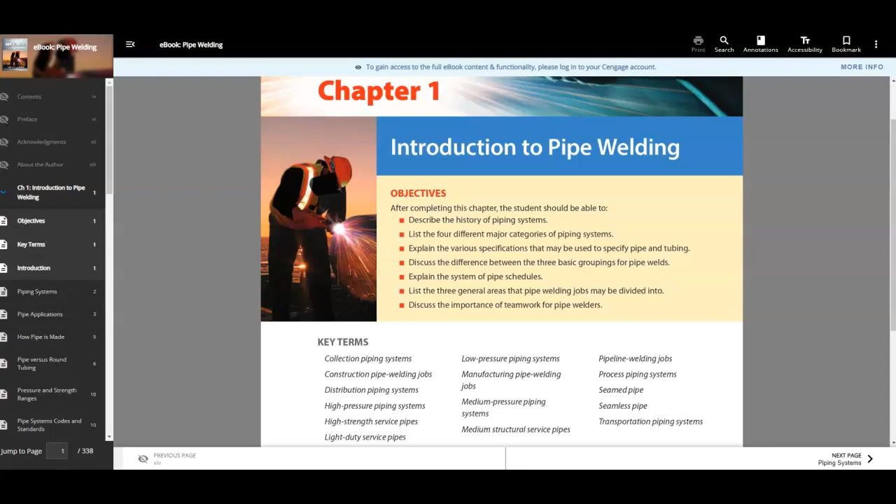Introduction. The earliest piping systems were built by the Greeks approximately 5,000 years ago to provide water to the residences on the island of Crete. Later, as the Roman Empire began to develop, the Romans expanded the Greek clay piping systems of fresh water to include a separate system of drain pipes throughout the city.

These early Roman clay piping systems were gradually replaced with lead pipe. The artisans of the day developed a new process to weld sections of the lead pipe together. Over time, much of the ancient city of Rome was plumbed for water through these lead pipes. Fortunately for the Romans, their water had a high mineral content that quickly coated the inside of the lead pipes,

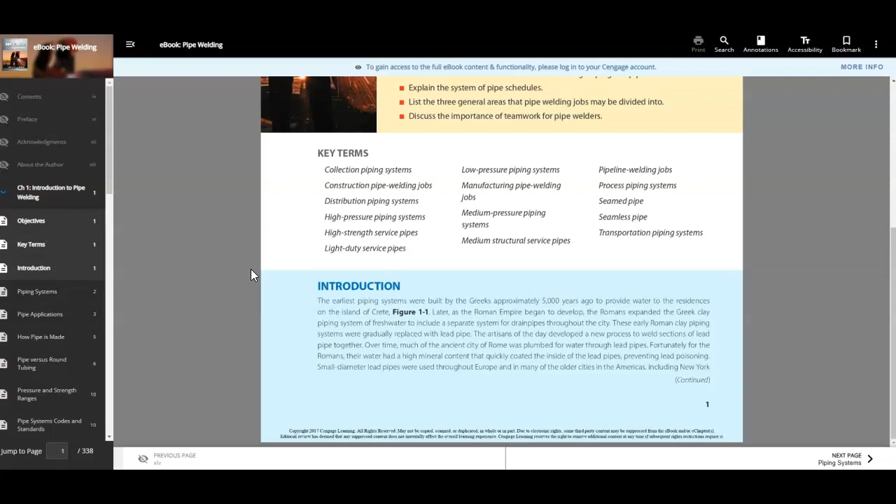preventing lead poisoning. Small diameter lead pipes were used throughout Europe and in many of the older cities in the Americas, including New York City, Boston, and Montreal. Water mains were initially constructed by hollowing out logs. Later, large water mains were made much like very long wooden barrels. Workers used narrow wood strips held together with metal bands tightly wrapped around the outside.

Figure 1-2. Over time, the lead pipes were removed. However, a few of the early wooden water mains that were constructed are still in service. These days, there are millions of miles of pipe used in a wide range of applications throughout the world. The ancient world was limited to only a few materials such as clay, lead, and wood.

But today, pipe can be made from many popular materials such as cast iron, steel, stainless steel, copper, brass, plastic, glass, fiberglass, and concrete. In this textbook, the major concentration will be on fitting and welding steel pipe because the skills learned with steel pipe can be transferred to stainless steel, aluminum, and other metal piping materials.

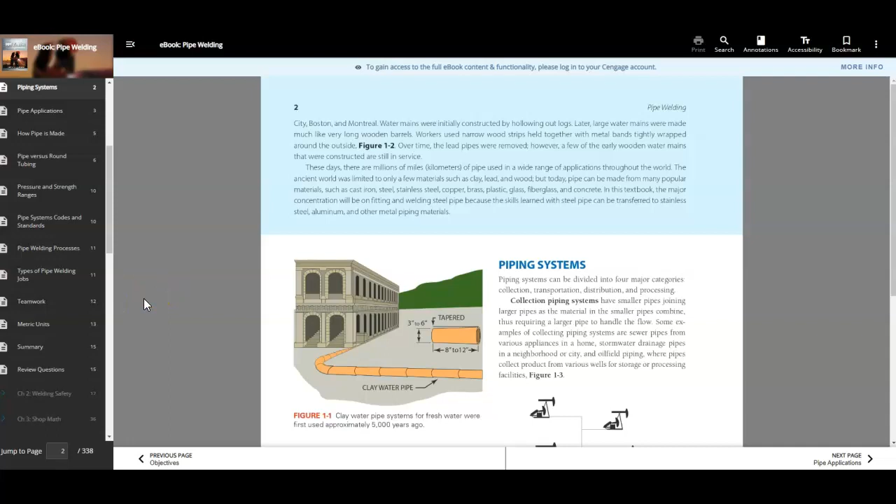Piping systems. Piping systems can be divided into four major categories: collection, transportation, distribution, and processing. Collecting piping systems have smaller pipes joining larger pipes as the material in the smaller pipes combine, thus requiring a large pipe to handle the flow.

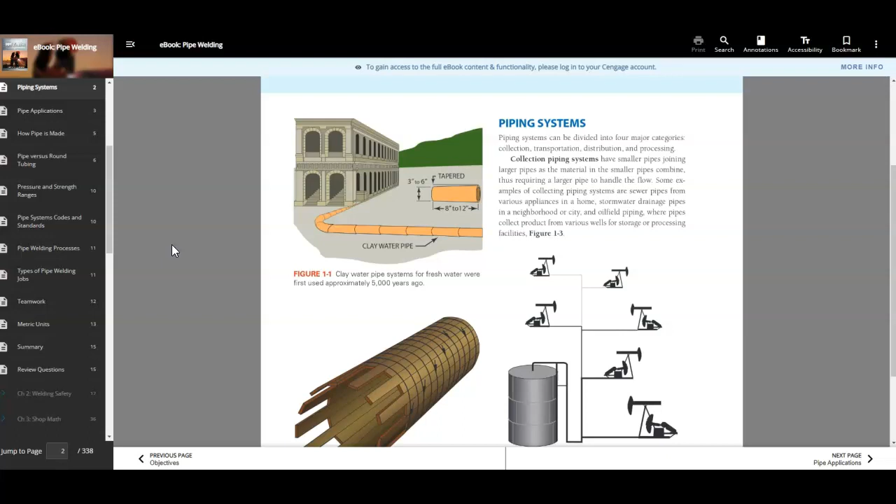Some examples of collecting piping systems are sewer pipes from various appliances in the home, stormwater drain pipes in the neighborhood or city, and oil field piping, where pipes collect product from various wells for storage and processing facilities.

They are usually buried beneath the Earth's surface and can be seen only where they surface at pumping and pressure regulator stations. Some examples of transportation pipelines are water pipes that are used to move raw water from reservoirs to water treatment plants, fuel lines that move gasoline, diesel fuel, and jet fuel from coastal refineries to distribution facilities inland,

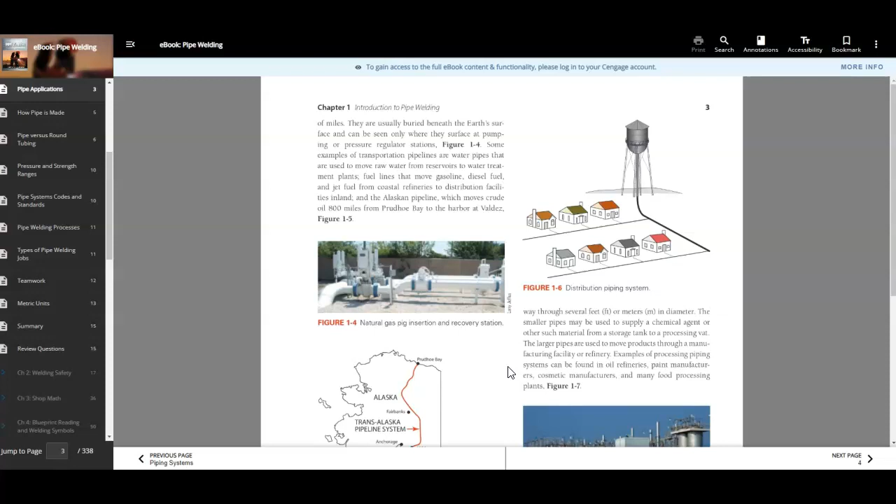and the Alaskan pipeline, which moves crude oil 800 miles from Prudhoe Bay to the harbor at Valdez.

Distribution piping systems have smaller individual pipes connected to large mains. They are used to deliver products such as natural gas and water for homes and factories, compressed air for pneumatic tools, shielding gases for welding, and chilled water for air conditioning. For many years, a brewery in Germany moved beer directly from its plants to a nearby stadium through a distribution piping system.

Process piping systems can be very diverse in size and materials. The diameter of some pipes may be as small as a fraction of an inch or a few millimeters, all the way through several feet or meters in diameter.

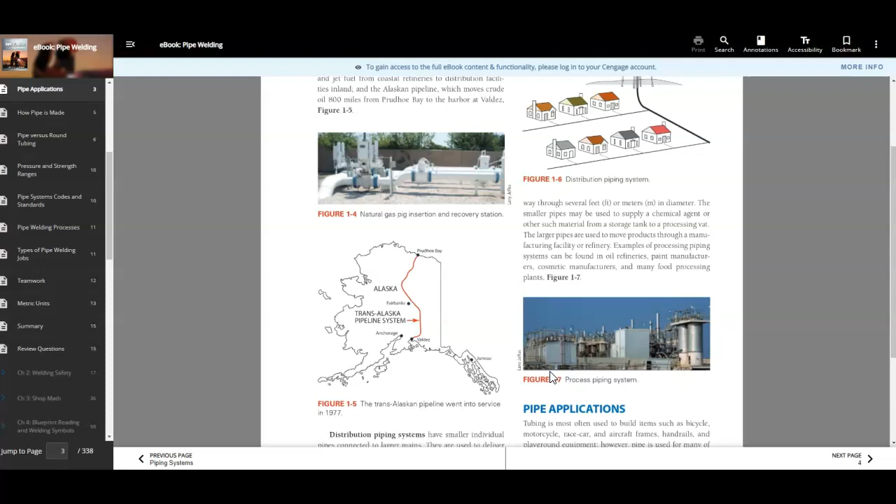The smaller pipes may be used to supply a chemical agent or other such material from a storage tank to a processing vat. The large pipes are used to move products through a manufacturing facility or refinery. Examples of process piping systems can be found in oil refineries, paint manufacturers, cosmetic manufacturers, and many food processing plants. Pipe applications.

Tubing is most often used to build items such as bicycle, motorcycle, race car, and aircraft frames, handrails, and playground equipment. However, pipe is used for many of these applications too. Both are used for structural applications or ornamental or decorative art.

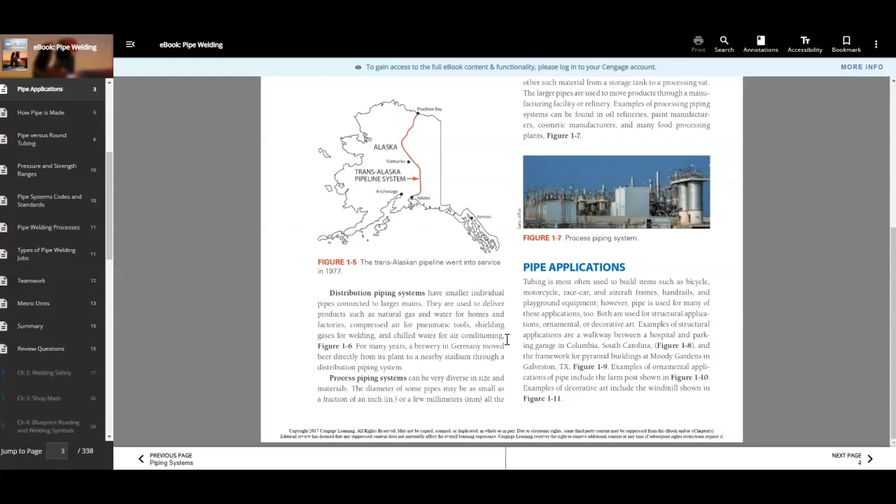Examples of structural applications are a walkway between a hospital and a parking garage in Columbia, South Carolina, figure 1-8, and the framework for pyramid buildings at Moody Gardens in Galveston, Texas, figure 1-9. Examples of ornamental applications of pipe include the farm post shown in figure 1-10. Examples of decorative art include the windmill shown in figure 1-11.

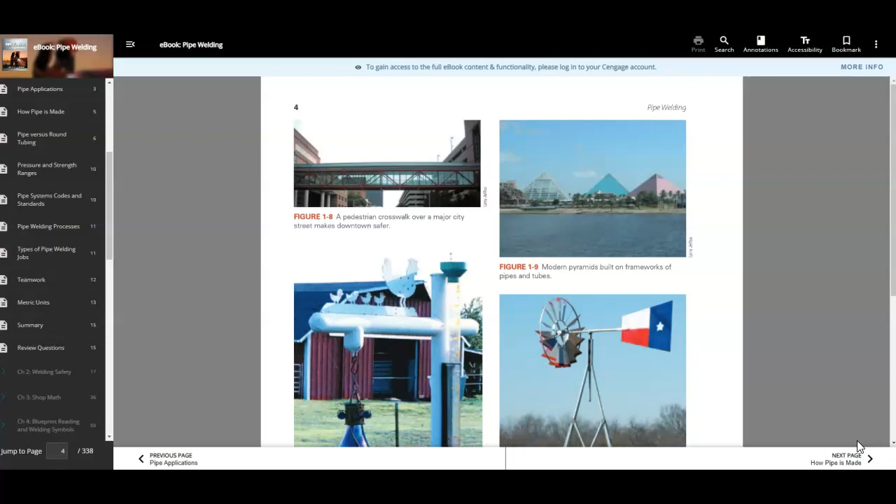A pedestrian crosswalk over a major city street makes a downtown safer. Modern pyramids built on frameworks of piping and tubes. Rain gauge or hummingbird feeder pipe garden posts, and a windmill built out of 1/2 inch electrical mechanical tubing.

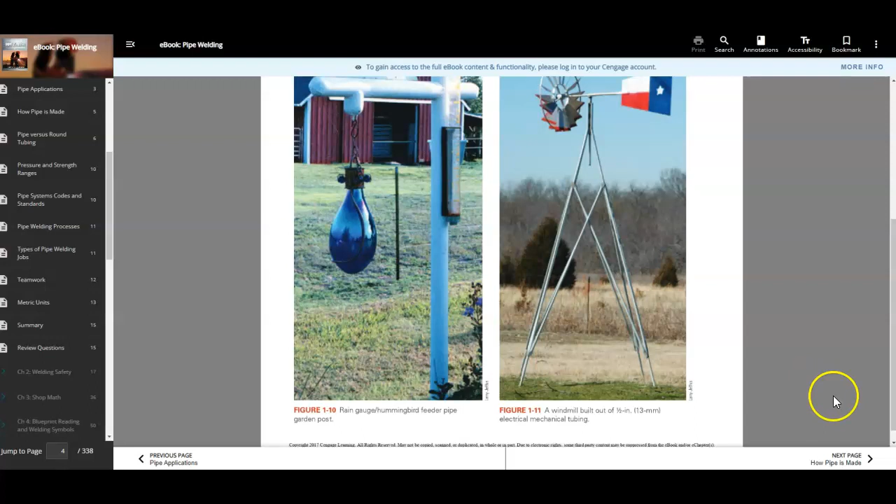How pipe is made. Pipe can be manufactured as seamed or seamless. Seamed pipe has a longitudinal weld along its full length. It is formed from flat plates that are first heated, then pressed through rollers that bend it into pipe shape. Resistance seam welding machines use rollers to pass the welding current through the pipe and to fuse the edges of the plate together, forming the longitudinal weld. Figure 1-12, seamed pipe manufacturing technique.

A cutter removes the small amount of weld flash from the outside of the weld. The small weld flash on the inside of the pipe may or may not be removed. The pipe is then cut into sections.

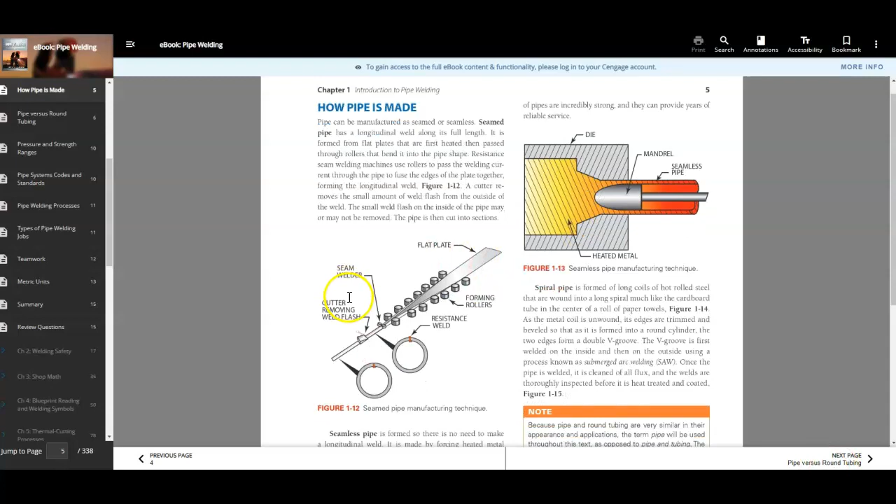Seamless pipe is formed so there is no need to make a longitudinal weld. It is made by forcing heated metal through a forming die that has an internal mandrel to form the center opening in the pipe. Figure 1-13 shows both seamless and seamed pipe sections are thoroughly inspected following manufacturing to ensure that they are sound. Both types of pipe are incredibly strong and they can provide years of reliable service. Seamless pipe manufacturing technique.

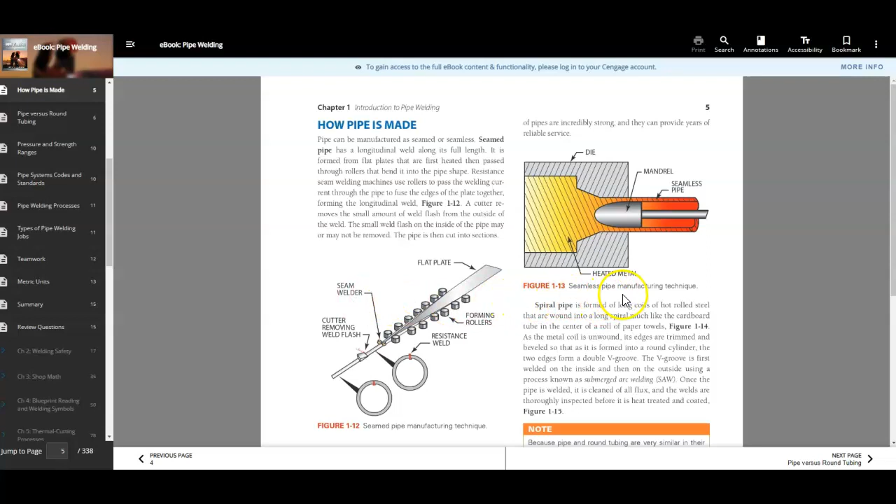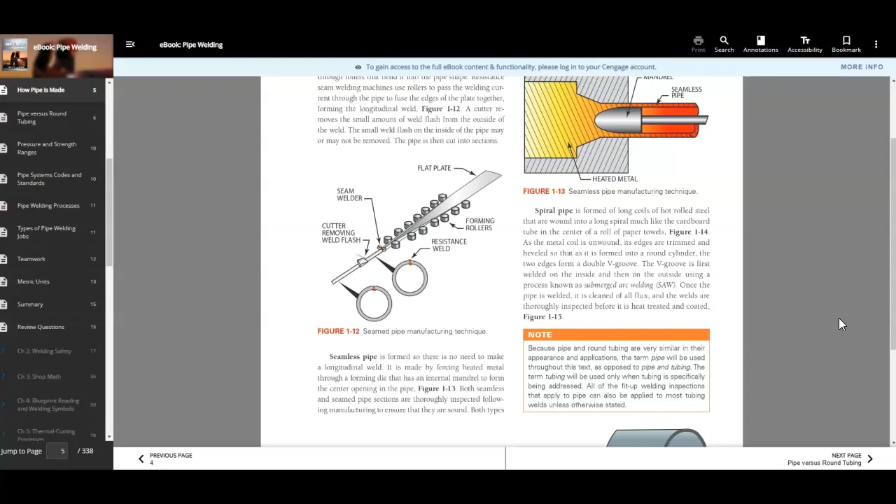Spiral pipe is formed of long coils of hot rolled steel that are wound into a long spiral, much like the cardboard tube in the center of a roll of paper towels. Figure 1-14 shows spiral pipe manufacturing technique. As the metal coil is unwound, its edges are trimmed and beveled so that it forms into a round cylinder. The two edges form a double V groove.

The V groove is first welded on the inside and then on the outside using a process known as submerged arc welding. Once the pipe is welded, it is cleaned of all flux and the welds are thoroughly inspected before it's heat treated and coated.

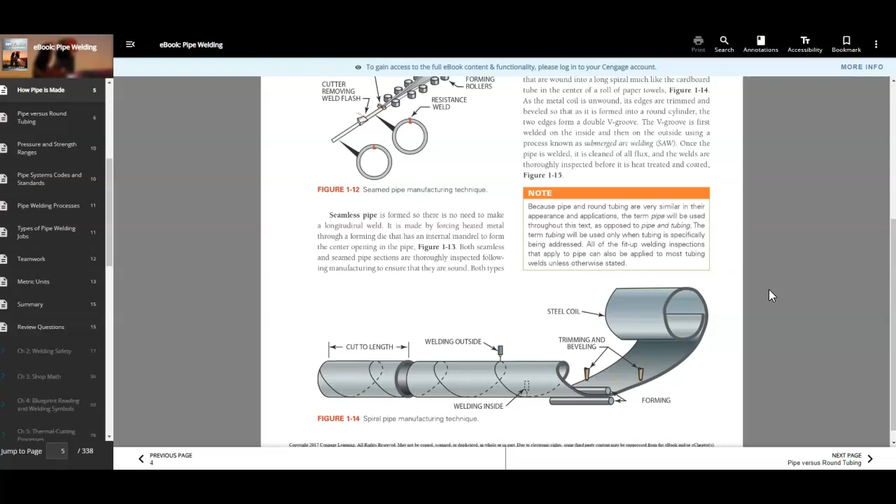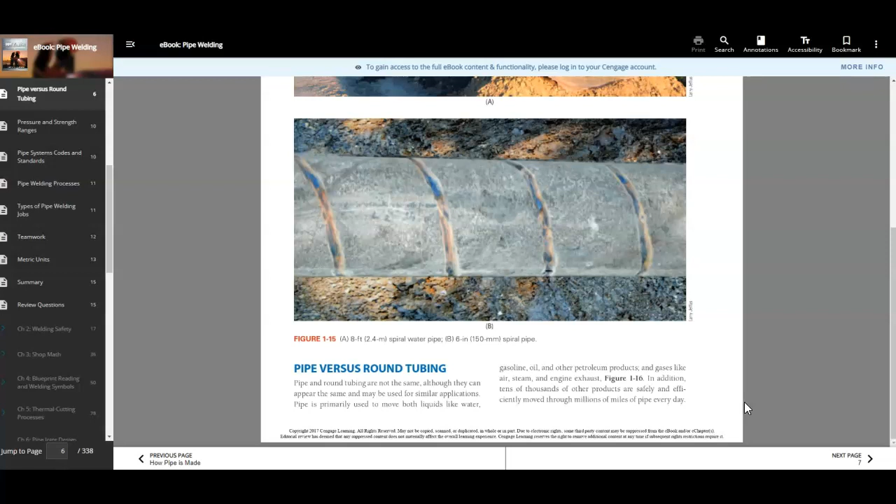Pipe versus round tubing. Pipe and round tubing are not the same, although they can appear the same and may be used in similar applications. Pipe is primarily used to move both liquids like water, gasoline, oil, and other petroleum products, and gases like air, steam, and engine exhaust. In addition, tens of thousands of other products are safely and efficiently moved through millions of miles of pipe every day.

Round tubing is used for both structural applications and to move fluids. Tubing is the structural component of many common products such as classroom and office furniture, highway guardrails, playground equipment, and roller coasters. Pipe and round tubing are different in the way they are specified.

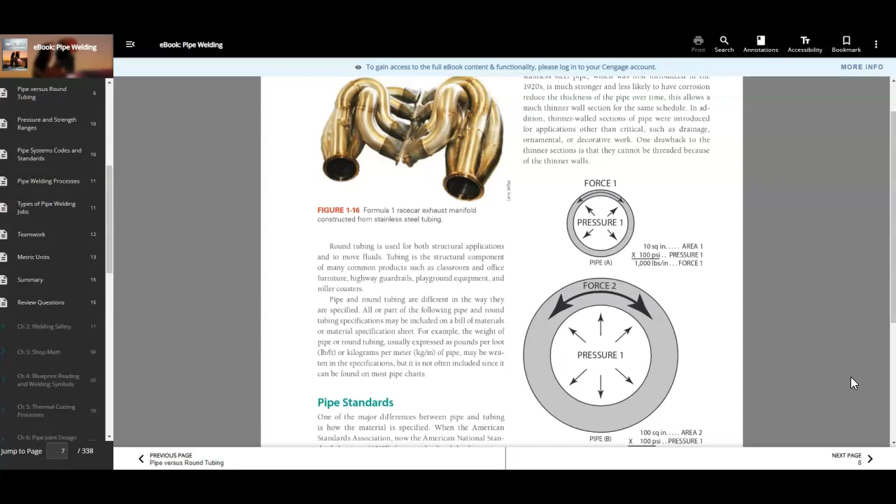All or part of the following pipe and round tubing specifications may be included on a bill of materials or a material specification sheet. For example, the weight of pipe or round tubing, usually expressed as pounds per foot or kilograms per meter of pipe, may be written in the specifications but is not often included since it can be found on most pipe charts.

Pipe standards. One of the major differences between pipe and tubing is how the material is specified. The American Standards Association, now the American National Standards Institute, ANSI, first standardized the dimensions for steel and iron pipe and tubing. There were few applications for pipe, so only a few different pressure ranges were available. The various pressure ranges determined the thickness of the wall of the pipe. Figure 1-17, diameter and wall thickness versus pressure.

The original standards only included standard, extra strong, and double extra strong. Today, standard pipe is often Schedule 40, extra strong pipe is often Schedule 80, and double extra strong pipe does not have a schedule number. Table 1.1 shows the various pipe schedules and wall thicknesses for a variety of pipe diameters that are available today. Changes in the marketplace have resulted in a significant increase in the various pressure ranges and wall thicknesses of the pipe.

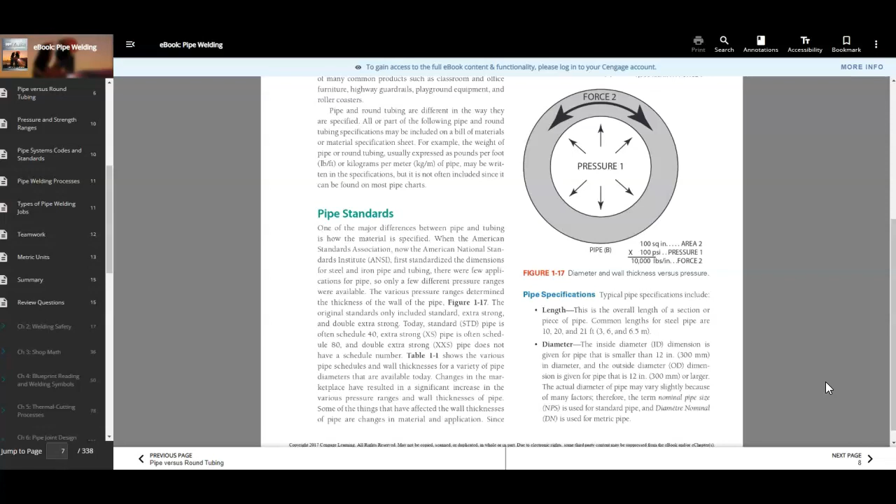Some of the things that have affected the wall thickness of the pipe are changes in the material and application. Since stainless steel pipe, which was first introduced in the 1920s, is much stronger and less likely to have corrosion, this reduced the thicknesses of the pipe over time.

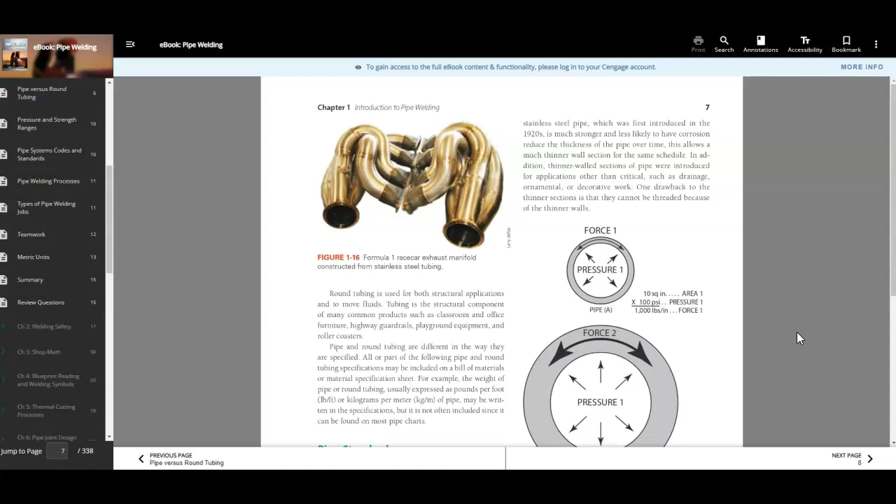This allows much thinner wall sections for the same schedule. In addition, thinner walled sections of pipe were introduced for applications other than critical, such as drainage, ornamental, or decorative work. One drawback to the thinner sections is that they cannot be threaded because of the thinner walls.

Pipe specifications. Typical pipe specifications include length. This is the overall length of the section or piece of pipe. Common lengths for steel pipe are 10, 20, and 21 foot.

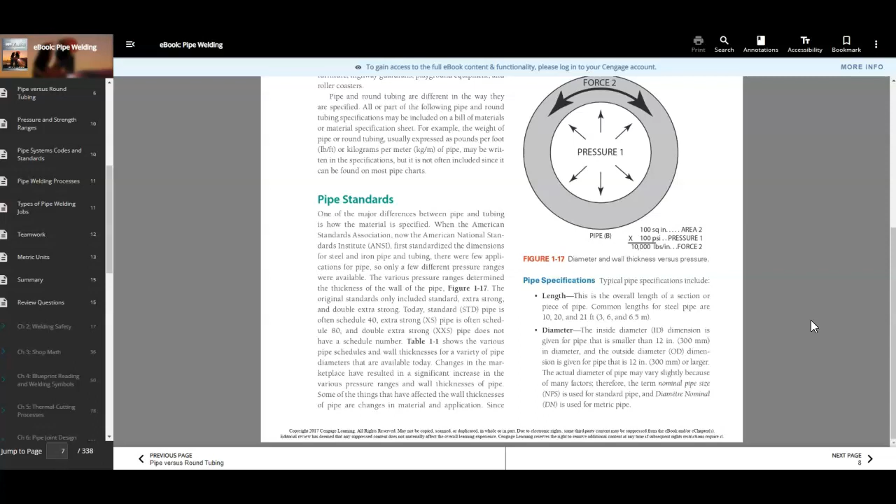Diameter. The inside diameter dimension is given for pipe that is smaller than 12 inches in diameter, and the outside diameter, OD, dimension is given for pipe that is 12 inches or larger. The actual diameter of the pipe may vary slightly because of many factors. Therefore, the term nominal pipe size is used for standard pipe, and diameter nominal is used for metric pipe.

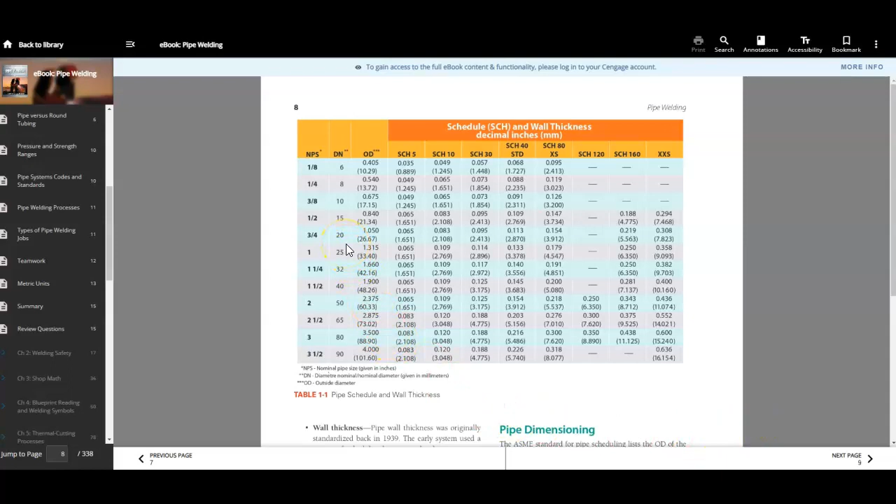Pipe wall thickness was originally standardized back in 1939. The early system used a system of schedules that were related to a pressure range. The basis of that original system grouped pipe into three pressure ranges: standard, extra strong, and double extra strong. The current standard for pipe wall thickness is the National Pipe Standard, Table 1-1.

Note on the chart that the current system still has some relationship to the early terminology, but it is important to note that now there is not a pressure range relationship, i.e., a Schedule 40 standard steel pipe has a higher pressure range than the Schedule 40 PVC pipe would have.

Material. The American Society of Mechanical Engineers, or ASME, has a number of specifications that cover a wide range of materials and methods of manufacturing pipe. The ASME specifications range from AS-135 for electrical resistance welding steel pipe to AS-378 for seamless, austenitic, high pressure, high temperature pipe. Fittings.

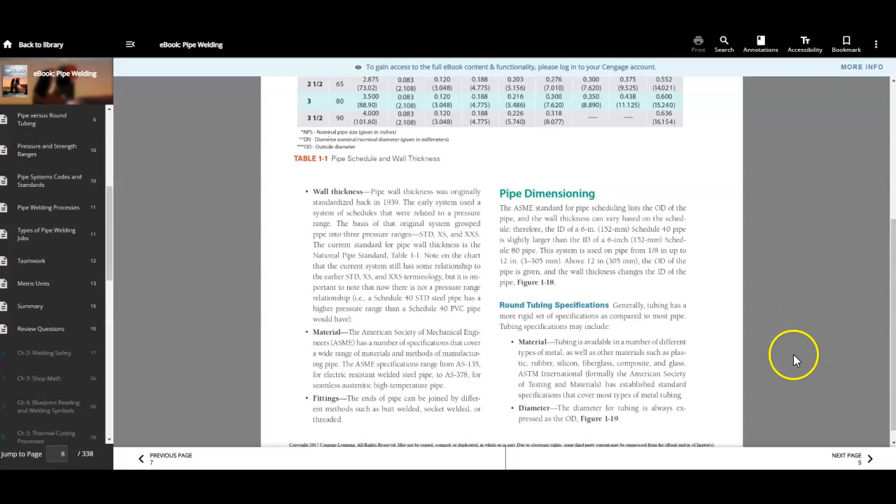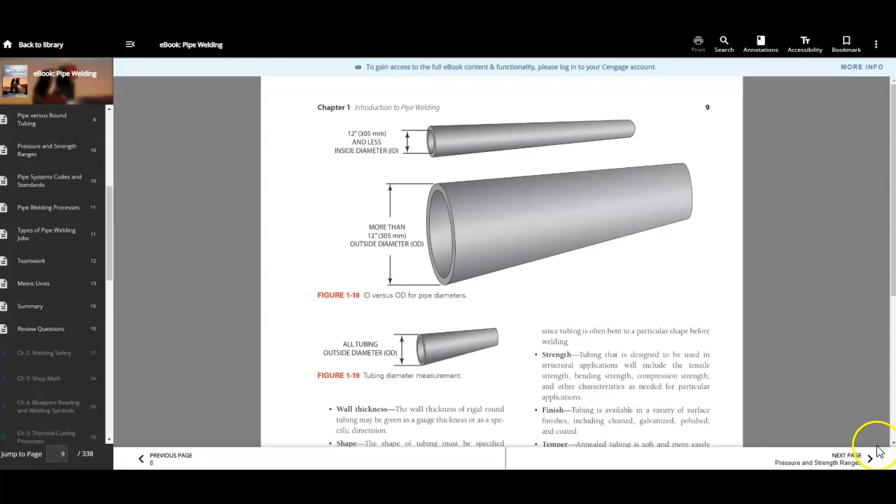ID versus OD for pipe diameters. 12-inch and less: inside diameter. More than 12 inches: outside diameter. All tubing is outside diameter.

Wall thickness. The wall thickness of rigid round tubing may be given as a gauge thickness or as a specific dimension. Shape. The shape of tubing must be specified because it is available in shapes other than round, such as rectangular, square, oval, and a wide range of specialty shapes.

Length. Rigid round tubing can be purchased in lengths ranging from 5 to 24 feet, and flexible round tubing can be purchased in coils ranging from a few feet to several hundred feet. Common lengths for flexible tubing are coils of 25 to 50 feet.

Pressure range. Because some types of tubing are designed to carry pressurized fluids, a pressure range for these tubes would be included in their specifications. Temperature range. The operating temperature range for the minimum or maximum service temperature is important because both high and low temperatures will affect the performance of the tubes.

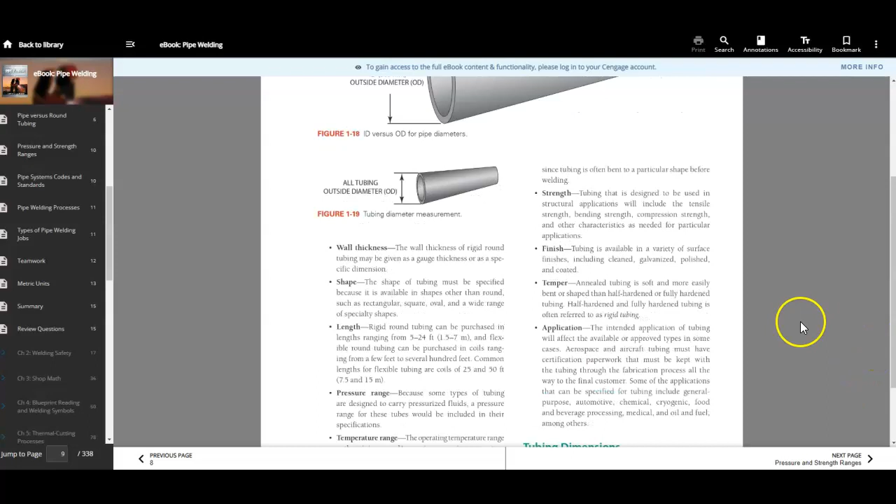Bending radius. The minimum bend radius of a tube can be a major determination in the selection, since tubing is often bent to a particular shape before welding.

Strength. Tubing that is designed to be used in structural applications will include the tensile strength, bending strength, compression strength, and other characteristics as needed for particular applications.

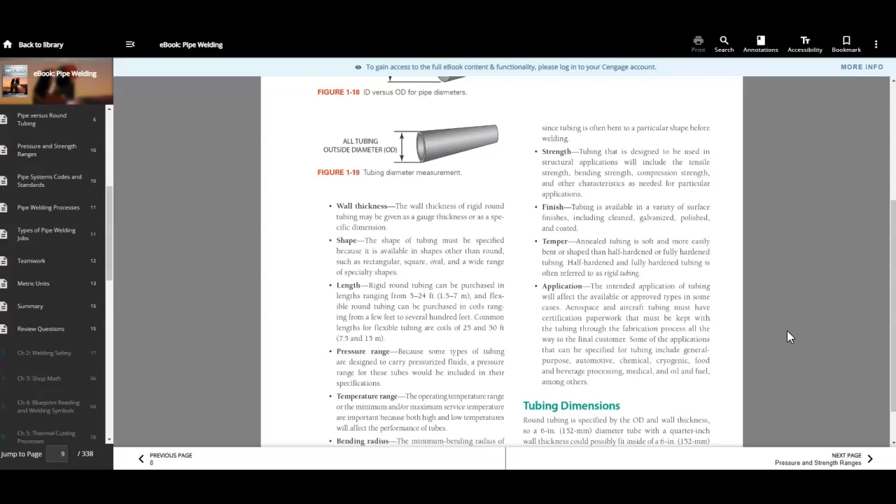Finish. Tubing is available in a variety of surface finishes, including cleaned, galvanized, polished, and coated.

Temper. Annealed tubing is soft and more easily bent or shaped than half-hardened or fully hardened tubing. Half-hardened and fully hardened tubing is often referred to as rigid tubing.

Application. The intended application of tubing will affect the available or approved types in some cases. Aerospace and aircraft tubing must have certification paperwork that must be kept with the tubing throughout the fabrication process, all the way to the final customer. Some of the applications that can be specified for tubing include general purpose, automotive, chemical, cryogenic, food and beverage processing,

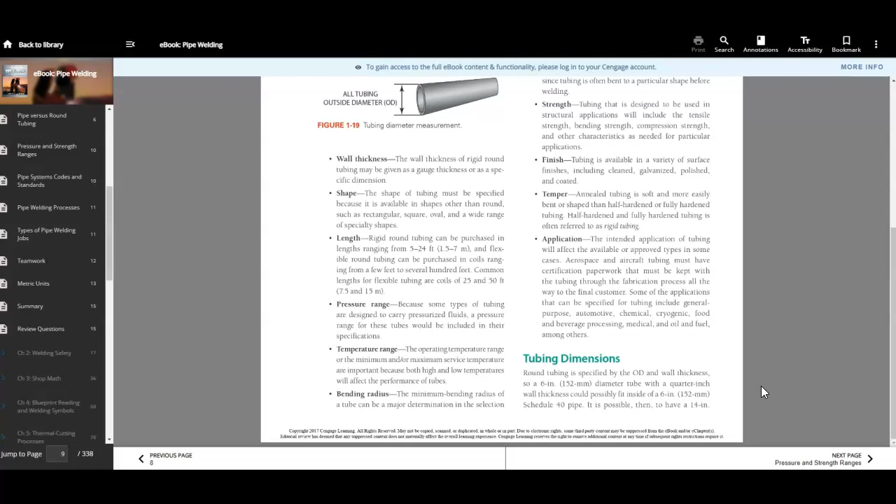Medical, and oil and fuel, among others. Tubing dimensions. Round tubing is specified by the outside diameter and wall thickness. So a 6-inch diameter tube with a quarter-inch wall thickness could possibly fit inside a 6-inch Schedule 40 pipe. It is possible then to have a 14-inch diameter pipe and a 14-inch diameter tube that would have the same wall thickness if the tubing wall thickness was specified to be the same as the pipe.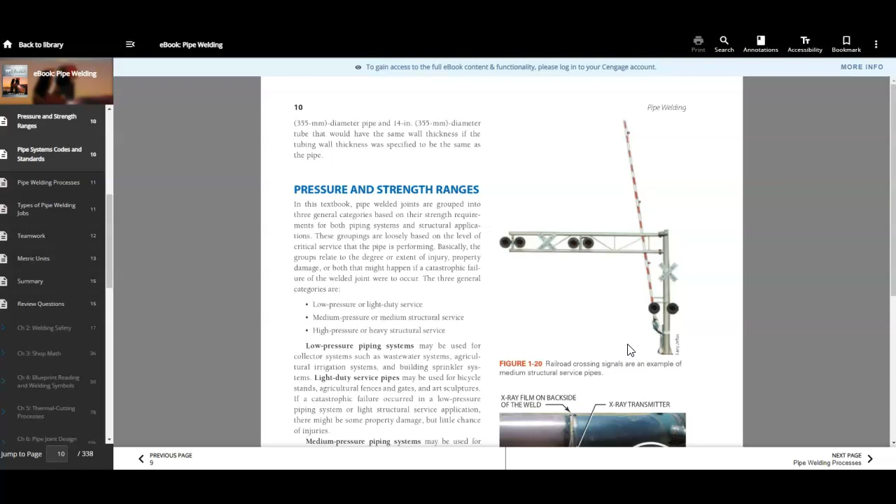Pressure and strength ranges. In the textbook, pipe welded joints are grouped into 3 general categories based on their strength requirements for both piping systems and structural applications. These groups are loosely based on the level of critical service that the pipe is performing. Basically, the groups relate to the degree or extent of injury, property damage, or both that might happen if a catastrophic failure of the weld joint were to occur.

The 3 general categories are low pressure or light duty service, medium pressure or medium structural service, or high pressure or heavy structural service.

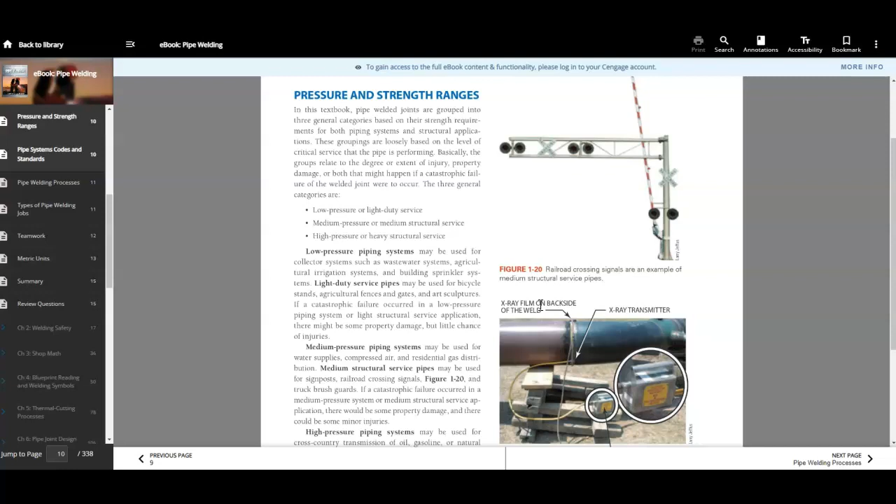Low pressure piping systems may be used for collector systems such as wastewater systems, agricultural irrigation systems, and building sprinkler systems. Light duty service pipes may be used for bicycle stands, agricultural fences and gates, and art sculptures. If a catastrophic failure occurred in a low pressure piping system or light structural service application, there might be some property damage, but little chance of injuries.

Medium pressure piping systems may be used for water supplies, compressed air, and residential gas distribution. Medium structural service pipes may be used for signposts, railroad crossing signals, and truck brush guards. If a catastrophic failure occurred in medium pressure systems or medium structural service applications, there would be some property damage and there could be some minor injuries.

High pressure piping systems may be used for cross-country transmission of oil, gasoline, and natural gas, oil refineries, and high pressure steam pipes in power plants. High strength service pipes may be used for aircraft engine mounts, building frameworks, and tank support legs. A catastrophic failure in a high-pressure system or a high-strength structure will result in significant property damage and can result in serious injury or possibly death.

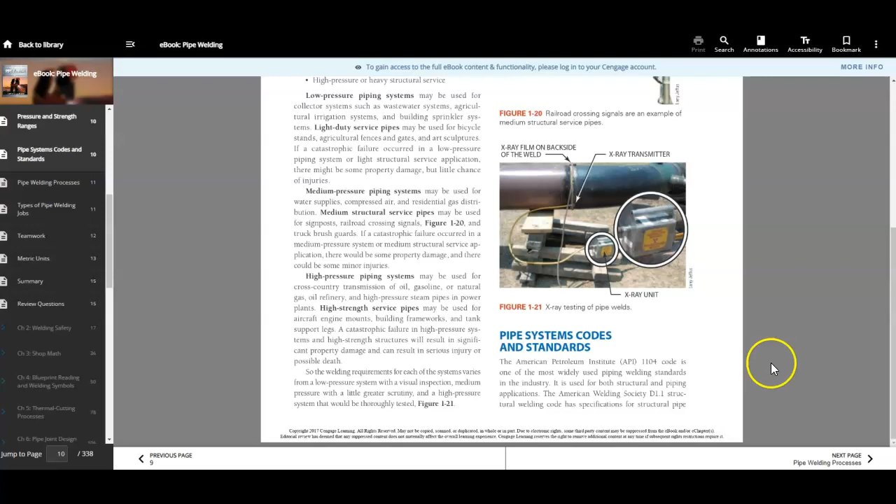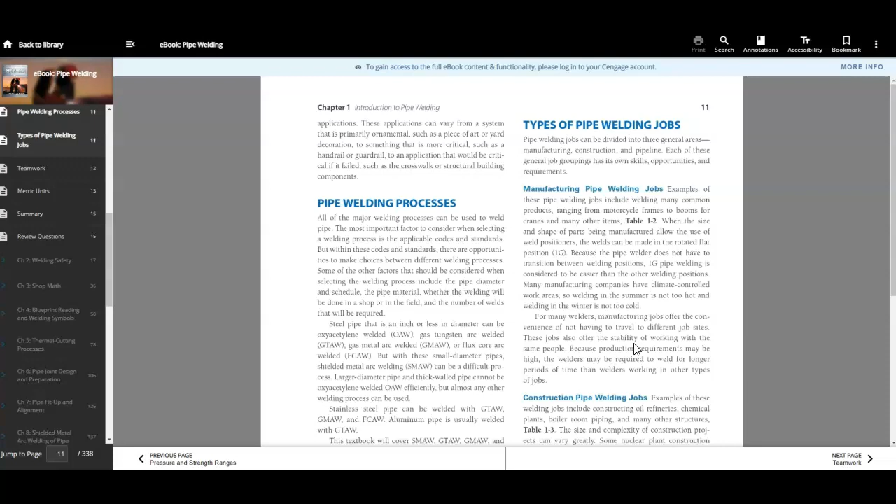The American Welding Society D1.1 structural welding code has specifications for structural pipe applications. These applications can vary from a system that is primarily ornamental, such as a piece of art or yard decoration, to something more critical, such as a handrail or a guardrail, to an application that would be critical if it failed, such as a crosswalk or structural building components.

Pipe welding processes. All of the major welding processes can be used to weld pipe. The most important factor to consider when selecting a welding process is the applicable codes and standards. But within these codes and standards, there are opportunities to make choices between different welding processes.

Some of the other factors that should be considered when selecting the welding process include the pipe diameter and schedule, the pipe material, whether the welding will be done in the shop or in the field, and the number of welds that will be required.

Steel pipe that is an inch or less in diameter can be oxyacetylene welded, gas tungsten arc welded, gas metal arc welded, or flux core arc welded. But with these small diameter pipes, shielded metal arc welding can be a difficult process. Large diameter pipe and thick walled pipe cannot be oxyacetylene welded efficiently, but almost any other welding process can be used.

Stainless steel pipe can be welded with TIG, MIG, or flux core. Aluminum pipe is usually welded with TIG. The textbook will cover stick, TIG, MIG, and flux, which are the most commonly used welding processes for pipe welding.

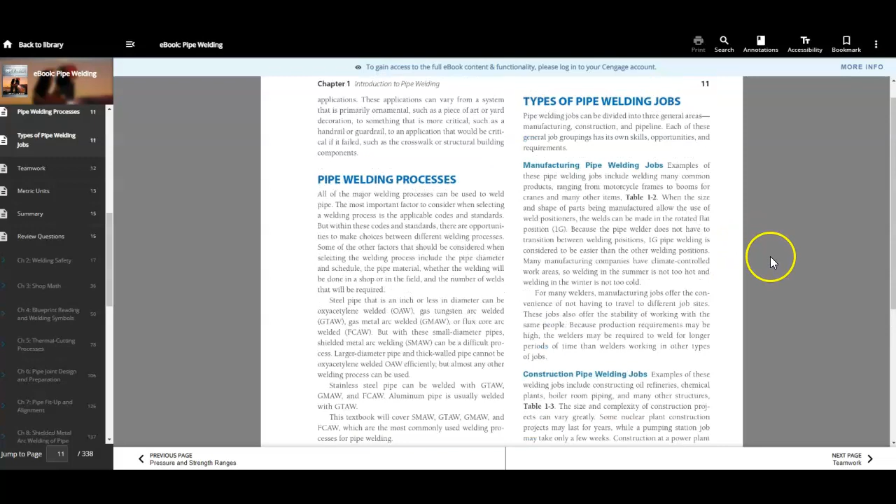Types of pipe welding jobs.

Pipe welding jobs can be divided into three general areas: manufacturing, construction, and pipeline. Each of these general job groups has its own skills, opportunities, and requirements.

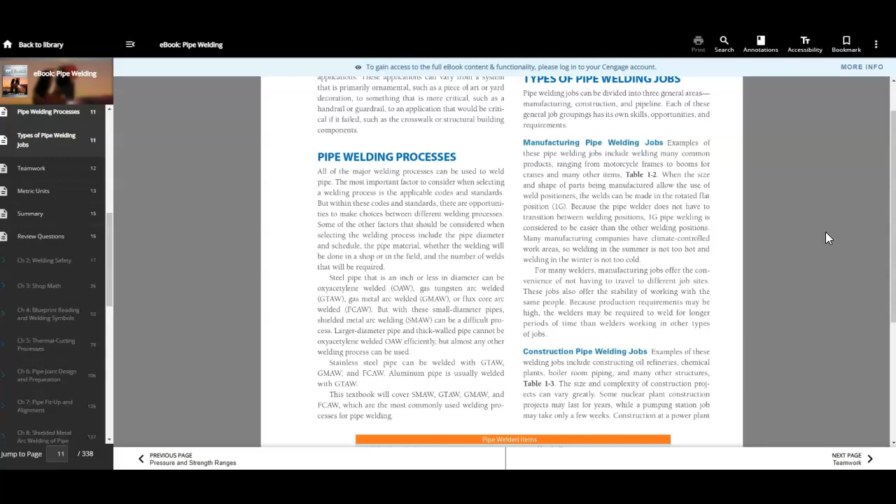Manufacturing pipe welding jobs. Examples of these pipe welding jobs include welding many common products ranging from motorcycle frames to booms for cranes and many other items. Table 1-2, pipe welding items that are manufactured with pipe.

When the size and the shape of the parts being manufactured allow the use of weld positioners, the welds can be made in the rotated flat position, 1G. Because the pipe welder does not have to transition between welding positions, 1G pipe welding is considered to be easier than other welding positions.

Many manufacturing companies have climate controlled work areas, so welding in the summer is not too hot and welding in the winter is not too cold.

For many welders, manufacturing jobs offer the convenience of not having to travel to different job sites. These jobs also offer the stability of working with the same people.

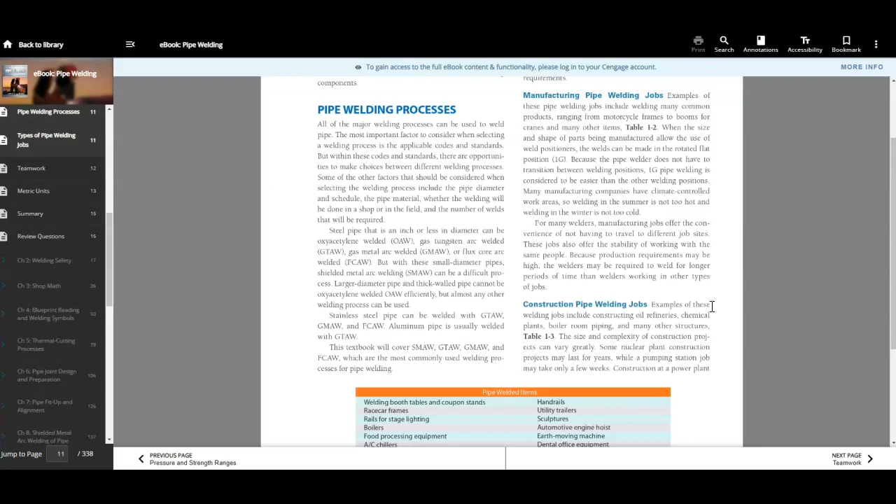Because production requirements may be high, the welders may be required to weld for longer periods of time than welders working in other types of jobs.

Construction pipe welding jobs. Examples of these welding jobs include constructing oil refineries, chemical plants, boiler room piping, and many other structures. Table 1-3. The size and complexity of construction projects can vary greatly.

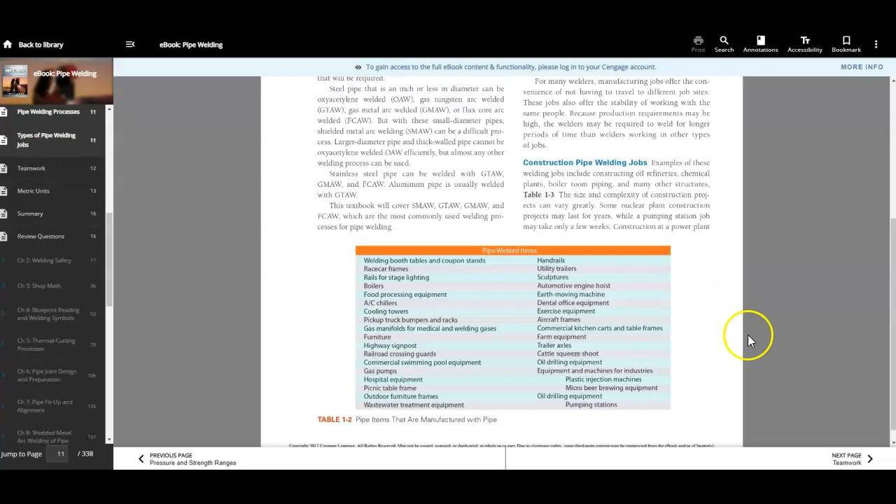Some nuclear power plant construction projects may last for years, while a pumping station job may only take a couple of weeks. Construction at a power plant

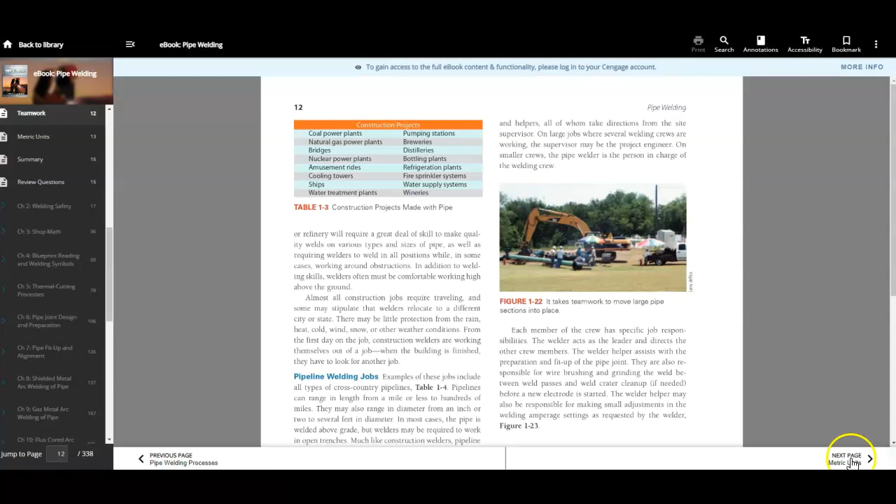or refinery will require a great deal of skill to make quality welds on various types and sizes of pipes, as well as requiring welders to weld in all positions while in some cases working around obstructions.

In addition to welding skills, welders often must be comfortable working high above the ground.

Almost all construction jobs require traveling, and some may stipulate that the welders relocate to a different city or state. There may be little protection from the rain, heat, cold, wind, snow, or other weather conditions.

From the first day on the job, construction welders are working themselves out of a job. When the building is finished, they have to look for another job.

Pipeline welding jobs. Examples of these jobs include all types of cross-country pipelines. Figures or table 1-4. Pipelines can range in length from a mile or less to hundreds of miles. They may also range in diameter from an inch or two to several feet in diameter.

In most cases, the pipe is welded above ground or above grade, but welders may be required to work in open trenches. Much like construction welders, pipeline welders may be required to travel or relocate and work in all types of weather.

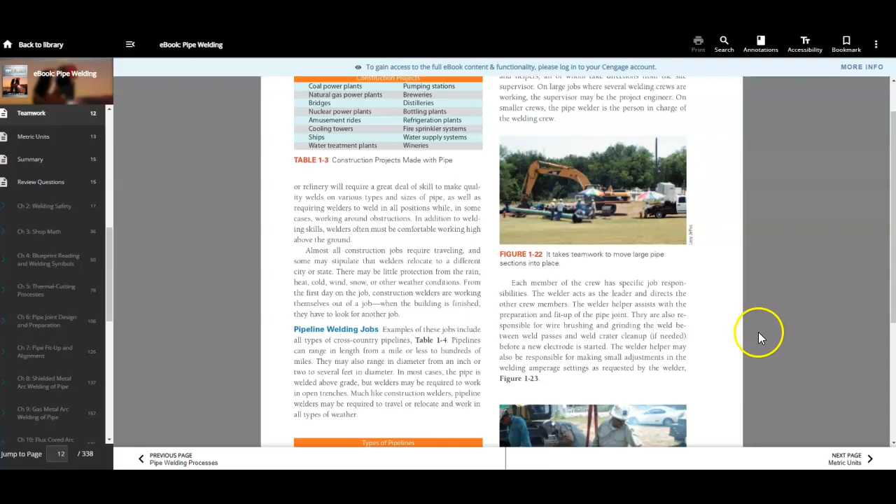Teamwork. There's a lot of work that needs to be done to make a weld on large diameter pipe. Often there is more work than a single welder can do in a timely manner to meet the scheduled deadline. So most pipeline welding jobs and many pipe construction welding projects are often done by a crew.

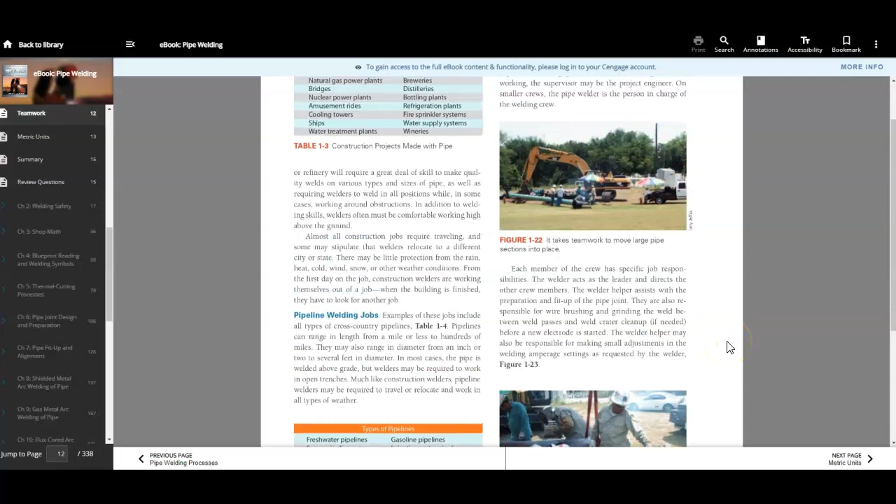Figure 1-22. It takes teamwork to move large pipe sections into place. The crews are made up by welders and helpers, all of whom take directions from the site supervisor.

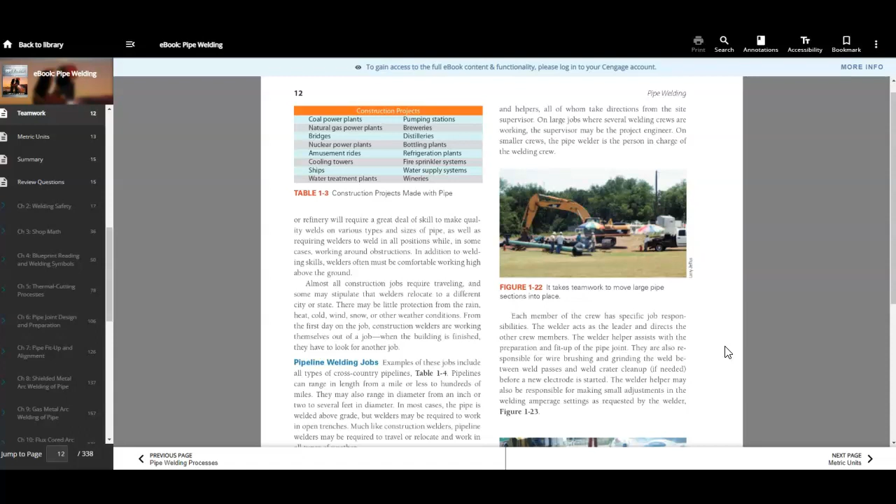On large jobs where several welding crews are working, the supervisor may be the project engineer. On smaller crews, the pipe welder is the person in charge of the welding crew. Each member of the crew has a specific job responsibility. The welder acts as the leader and directs the other crew members.

The welder helper assists with the preparation and fit up of the pipe joint. They are also responsible for wire brushing and grinding the weld between weld passes, and weld crater cleanup if needed before the new electrode is started. The welder helper may also be responsible for making small adjustments in the welding amperage settings as requested by the welder.

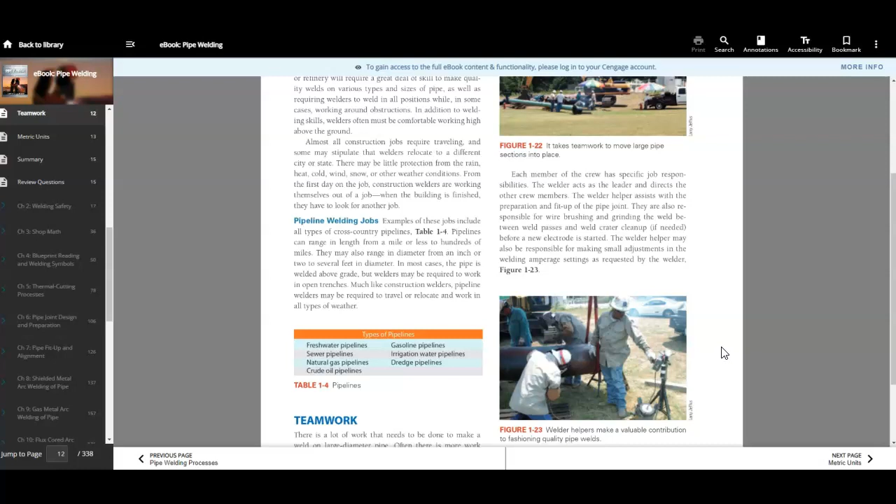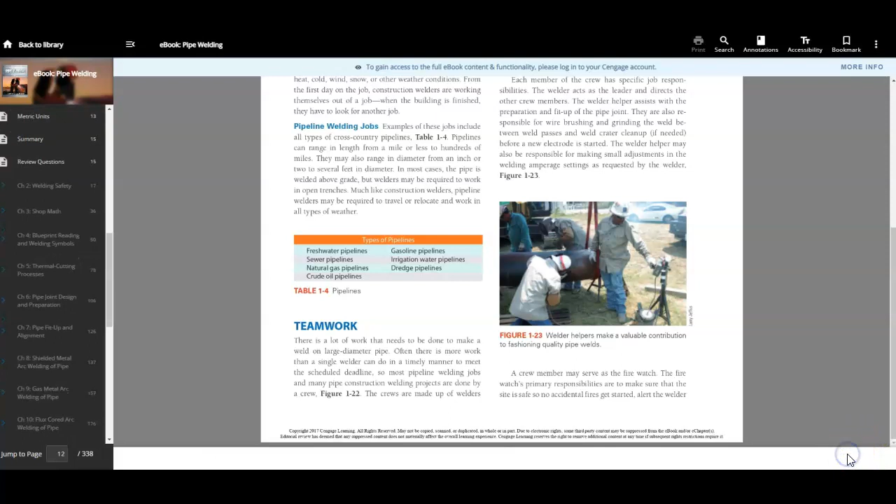A crew member may serve as a fire watch. The fire watch's primary responsibilities are to make sure the site is safe so no accidental fires get started, to alert the welder and sound the alarm if a fire does occur, and be prepared to use the available fire extinguisher to put out the fire. When all combustible materials cannot be removed from the welding area, this person may wet them down or cover them up.

Other crew members may operate equipment to lift and place the pipe joints and pipe sections in place, as well as performing other tasks that are required.

Leadership. A team leader must have knowledge of the equal employment opportunity laws regarding job discrimination and make sure these laws are followed. A good team leader should have a positive attitude, think and plan ahead, treat everyone with respect, show confidence in crew members' abilities, and most important, communicate clearly to each member what is expected of him or her.

It is important to recognize the various strengths and weaknesses of each crew member so that the person can be used in the most effective manner to get the job done. When necessary, leaders should coach crew members in how they want them to do their jobs. Often demonstrating the proper way to do something can be helpful.

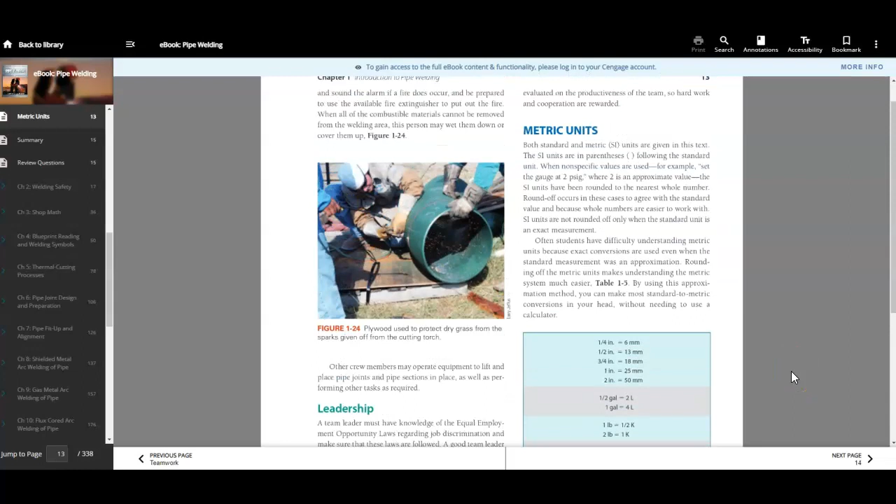A crew that works well together will be much more productive than one that is dysfunctional. As crew leaders, you need to be able to help resolve conflicts between team members, identify the key issues that might be causing the conflict, and get the crew to agree on how the problem can be resolved. A work crew's performance is usually evaluated by the productiveness of the team, so hard work and cooperation are rewarded.

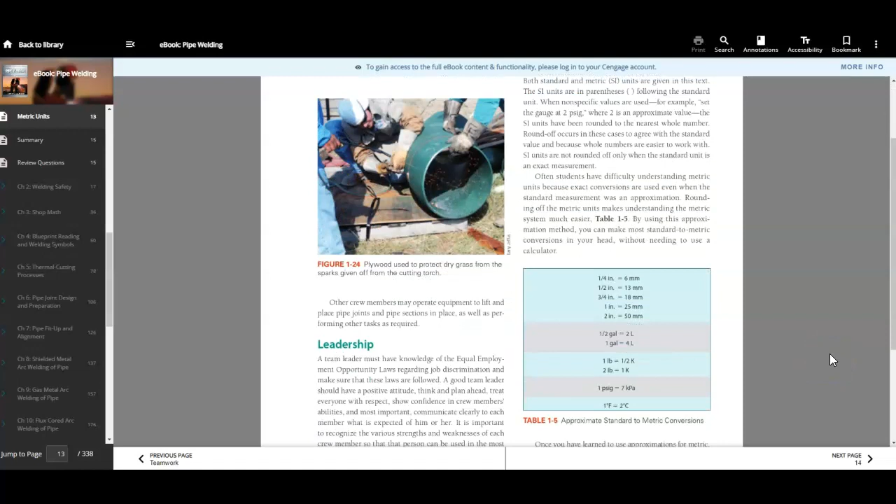Metric units. Both standard and metric units are given in the text. The metric or SI units are in parentheses following the standard units. When non-specific values are used, for example, set the gauge at 2 psig, where 2 is an approximate value, the SI units have been rounded to the nearest whole number. Round off occurs in these cases to agree with the standard value, and because whole numbers are easier to work with, SI units are not rounded off only when the standard unit is an exact measurement.

Often students have difficulty understanding metric units because exact conversions are used even when the standard measurement was an approximation. Rounding off the metric units makes understanding the metric system much easier. By using the approximation method, you can make most standard to metric conversions in your head without needing to use a calculator.

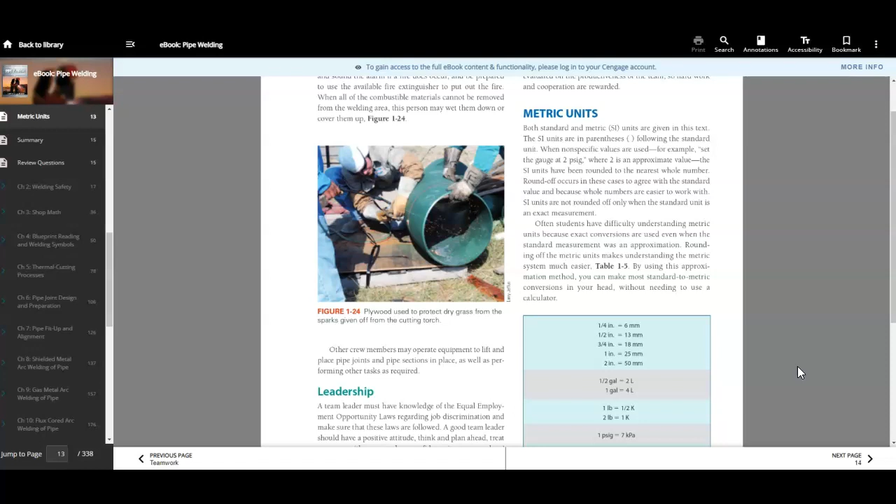Once you have learned to use approximations for metric, you will find it easier to make exact conversions whenever necessary. Conversions must be exact in the shop when a part is dimensioned with one system's units and other systems must be used to fabricate the part. For that reason, you must be able to make those conversions.

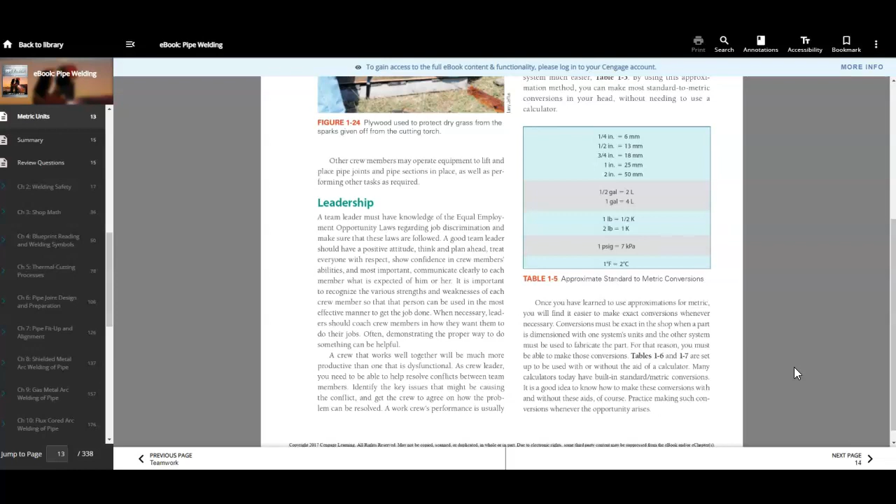Tables 1-6 and 1-7 are set up to be used with or without the aid of a calculator. Many calculators today have built-in standard metric conversions. It's a good idea to know how to make these conversions with or without these aids. Practice making such conversions whenever the opportunity arises.

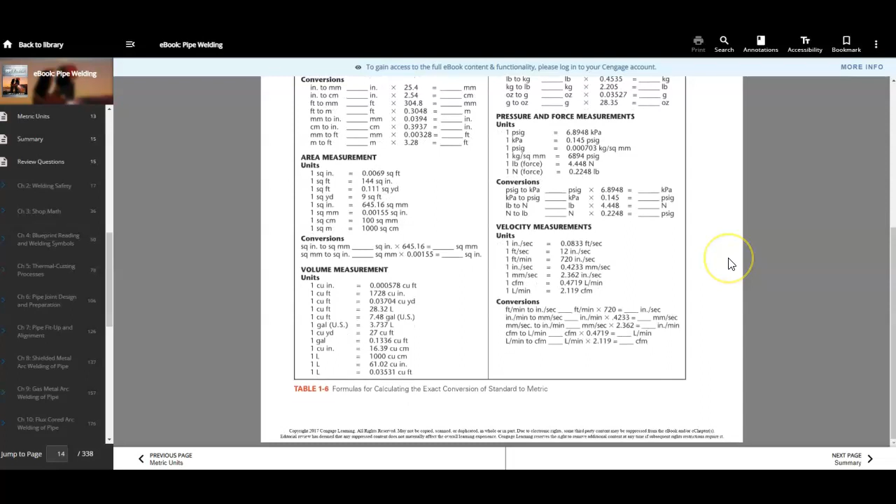Formulas for calculating exact conversion of standard to metric.

Summary. Pipe welding offers welders a wide range of opportunities for jobs and a wide range of industries. It can also be one of the most rewarding welding fields, both personally and financially. The high quality welds required for most pipe welding let welders truly demonstrate their welding abilities.

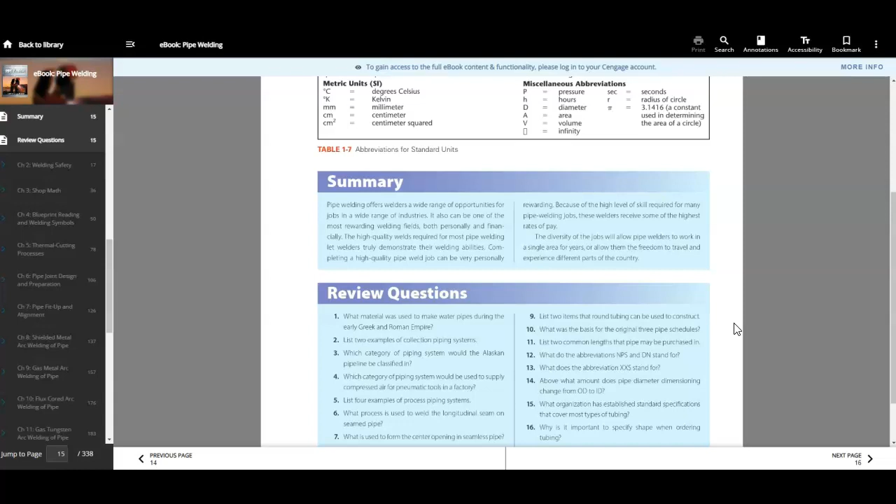Completing a high quality pipe weld job can be very personally rewarding. Because of the high level of skill required for many pipe welding jobs, these welders receive some of the highest rates of pay. The diversity of the job will allow pipe welders to work in a single area for years, or allow them the freedom to travel and experience different parts of the country.